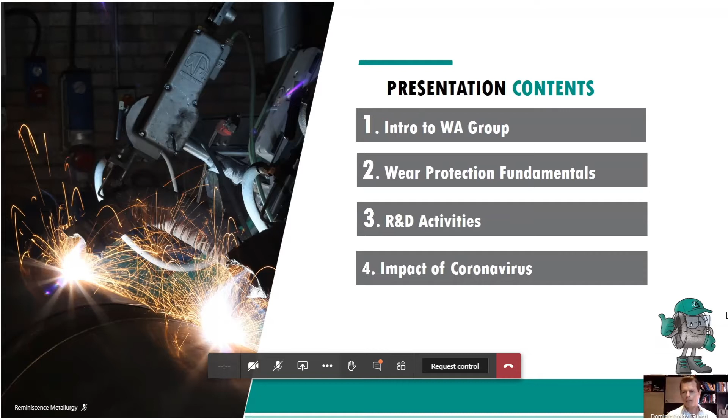Just to give you a little bit of background, the company was started by my dad, Dr. Jan Stekly, and I grew up very close to the factory. Every day my dad would come back from the factory, he would have lengths of wire, he would have little weld samples, and I thought this is... sorry, I haven't gone on to that yet, sorry.

If you don't mind just scrolling back. How about I just tell you when to move forward?

Thank you. So he would come back every day with little weld samples and lengths of wire, which I found unbelievably boring when I was a kid. So when the time came for me to decide what I wanted to do, I decided I didn't want to have anything to do with the family business, and so I became a lawyer. Then after doing that for a few years, I decided to change tack entirely and join my brother in the family business in Welding Alloys. I can say actually that doing metallurgy would have certainly been a lot easier in terms of the learning curve at the beginning, because it's a very, very technical activity, what we do, and it's really rooted in metallurgy, and we'll get onto that shortly.

So there's three divisions basically to Welding Alloys. The first is the manufacture of welding consumables, so consumables being wire, predominantly cored wire, and also electrodes. We also manufacture equipment for wear protection, and we have a service activity where we get components into our workshop and also go on site and do welding service work. If we could move on.

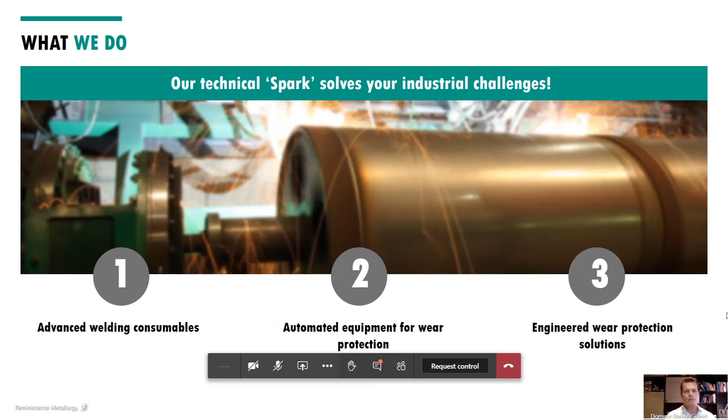So we service a wide range of industries, and the advantage of being well diversified is if any particular industry is suffering a downturn, there are others which make up the slack. So certain industries at the moment, for example, oil and gas is really suffering, and so they might not be spending a lot on infrastructure, but maybe mining is, so there's always some which are going well, some which are not doing so well. I think that's a big advantage to working in an industry which serves many other industries. Next slide, please.

So that's a photo of my dad. He originally grew up in Czechoslovakia, he was born in Czechoslovakia. They left Czechoslovakia in 1938. He grew up in Brazil, traveled to Canada, met my mother in Canada, moved to England, did an MSc in metallurgy at Cranfield University, and after that set up Welding Alloys Limited in Fowlmere, which is a small village outside of Cambridge. Later on in life, he also did his PhD in metallurgy at Cambridge University. So metallurgy, in terms of the formulations of the products that we make, is really grounded within the company.

Today we have approximately 45 metallurgists working within Welding Alloys in different fields throughout the world. We started off making flux initially, and then moved into making cored wire. I'm not sure if you're all familiar with cored wire, but it's basically a process where you take a steel strip, you form it into a U or a V, put in powdered minerals or metals, close it over, and then draw it down, and then put it onto bobbins and spools and drums.

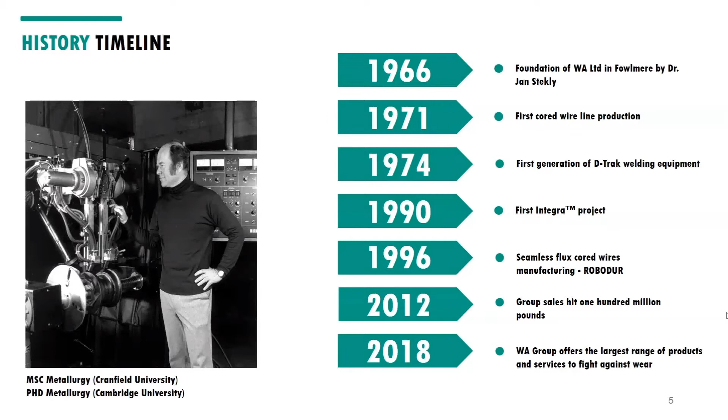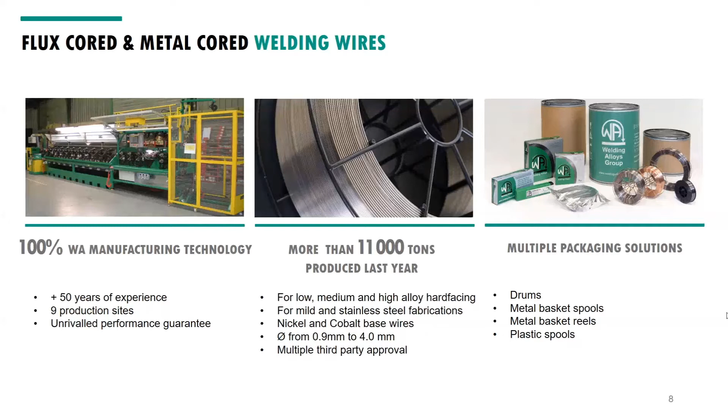We made around 11,000 tons last year, considering a lot of them were very small batches - we'll make 150 kilograms or 500 kilograms of a particular batch to meet exactly what the customer needs from a product standpoint. That's something we do that a lot of our competitors don't. They want to manufacture hundreds of tons of the same product, otherwise it's not profitable for them. We have a very different model where we try to really understand exactly what the customer wants and make the product tailor-made to them. Then the packaging - you may have seen in your time spent in workshops - that's spools, coils, and drums of welding material.

So we have a complete range of hard-facing cored wires. We were more well known to begin with for hard-facing, which protects against abrasion and impact, versus cladding, which protects against corrosion. But we are the number one leader around the world in hard-facing, and we manufacture a complete range of hard-facing materials.

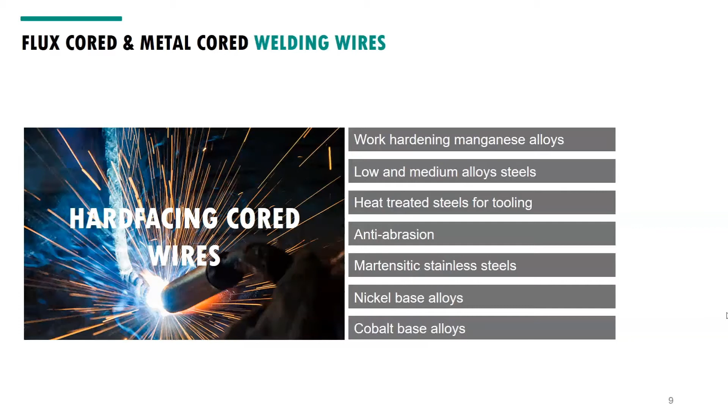Next slide. We also focus on joining to a lesser degree, more focused on advanced welding consumables where there are particular applications where we know we can add certain value to a product or application to make exactly what the customer needs. The vast majority of the welding market is in constructional low alloy steels, used for construction, ships, or bridges. There isn't a lot of value add there, it's a very commoditized market, and we tend to stay away from those sorts of applications.

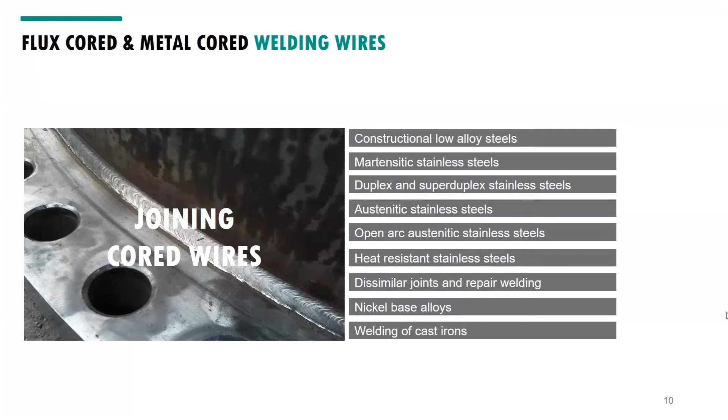Next slide, please. Moving on to our welding equipment - again, this is made in France. On the left here, you can see a 5-head machine, which is used for welding plates, a steel substrate with a welded surface on top, which provides very high wear resistance in an abrasion type of application.

We have a variety of different machines. These are all custom made for different applications. So if it's screw flights or roll cladders for the steel industry, we'll custom make a machine to meet that need, and that is a bit like the razor blade and razor type of application. You sell them a machine, and then you often develop a very deep relationship with the customer, and you end up supplying the welding consumables thereafter. So that's kind of a nice thing about offering both machines and consumables.

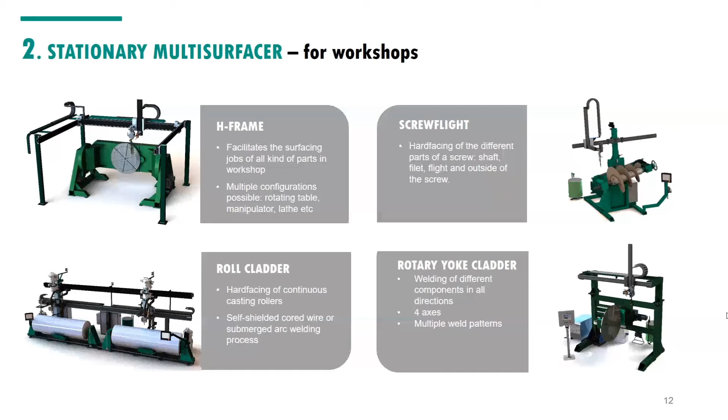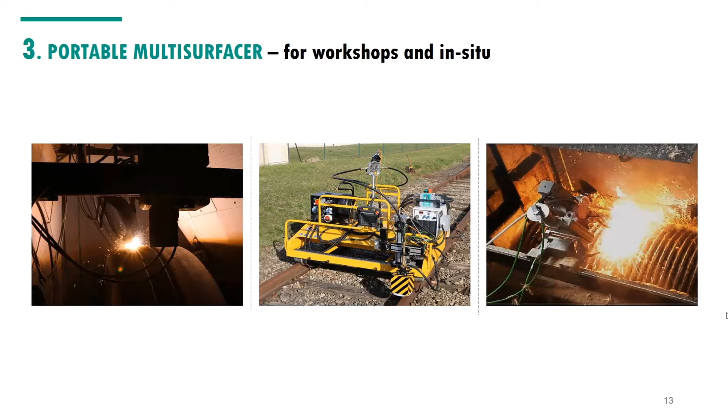And on the right, we have a machine for the sugar mill in the sugar industry. Underneath there, you can see the teeth of a sugar mill roll, used for crushing sugarcane. That suffers from a lot of abrasion as well as corrosion. So we have particular solutions which can be used to increase the efficiency of sugarcane recovery.

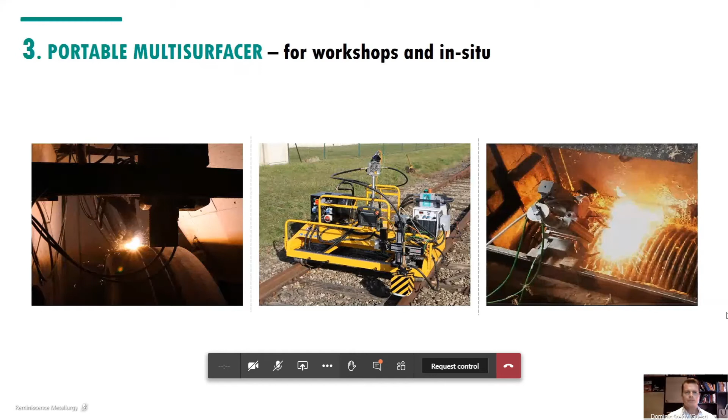Then our Integra services. This is where, like I mentioned before, we use our machines and our wires to provide a complete service to the customer. It's a big part of actually going in, understanding exactly what the customer wants, looking at the wear profile, using our experience as well.

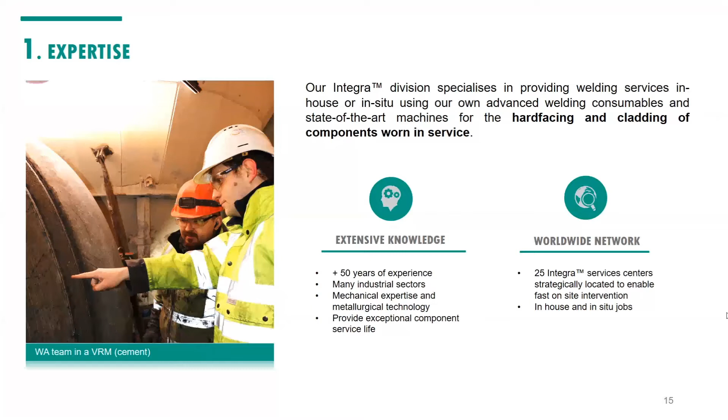Sometimes we will redesign the geometry of certain components in order to provide longer life. And we have about 25 service centers around the world, significantly more than we have for wire production, because it's something where you really need to be local and close to your customer and understand exactly what they need. We go in and offer, using our metallurgical and mechanical expertise, something different and better than what they're used to.

A lot of the time, it's understanding the precise working conditions of that component and understanding where the wear profile is. So even though you might have two identical pieces of equipment in two different plants, the wear profile may be different. And so we'll often use two or three different types of material to weld one component.

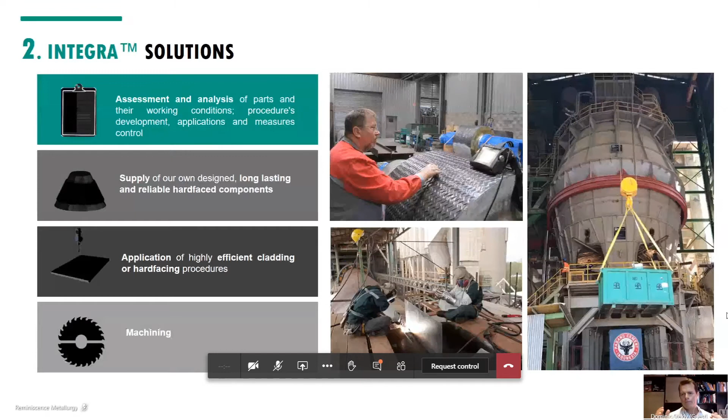In the areas where we have the most amount of wear, we'll use a more high alloy, maybe more expensive type of material, but then we might get a uniform wear profile rather than a severe wear profile in one area, which causes that component to then have to be taken out of service. So we're always trying to make everything fail or wear out more or less at the same time.

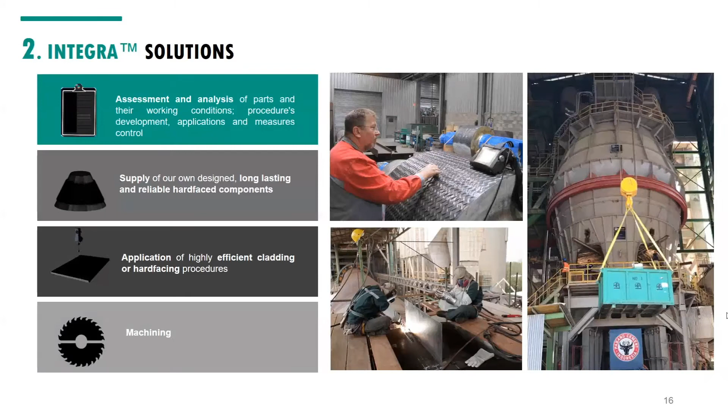And often understanding with the customer when their maintenance shutdowns are, because sometimes a component might be lasting 1.5 years and they don't need 3 years, they only need it to last 2 years. So understanding and offering something which is efficient and just provides exactly what the customer requires.

There are a vast number of different Integra applications. We have, in every single industry, areas wherever you've got any type of material transportation, crushing, milling, grinding, any type of material flowing through another component, any type of hammers or material metal-to-metal wear, we find wear.

So one of the applications, we've got some pipes, we've got a zinc galvanizing pot used in the steel plant, a sieve there which is used for sizing, probably in the sinter plant, hammers maybe in the cement industry, other applications in blast furnaces. But every single industry where there is any of those types of processes, there are applications for us to come in, use our expertise, and make those components last longer.

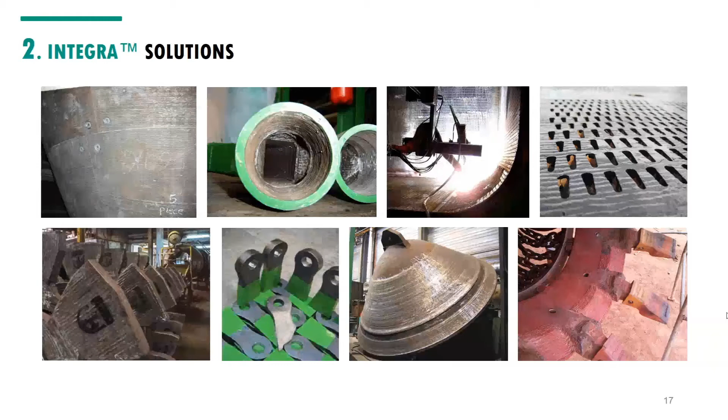So really working together with our clients, we'll look at all of these types of wear. We want to understand exactly what type of wear the component is under, what the part's being used for, what the problems are, what the part actually is, dimensions, photographs, why the last one got worn out, where it got worn out. Sometimes there are things that the customer doesn't actually realize, like maybe the magnetic separator isn't working, and you might get tramp iron coming through different components. We're really trying to understand and go in as a trusted advisor, going through all the details, not just trying to sell them any product, but really understand deeply the application.

I'm sure you're all familiar with carbon equivalent, understanding what the base metal is, and that'll help determine preheat and post-weld heat treatment required, if any, what type of procedure to use, thickness of deposit, whether you can withstand cracks. All of these things can be very important in our product selection.

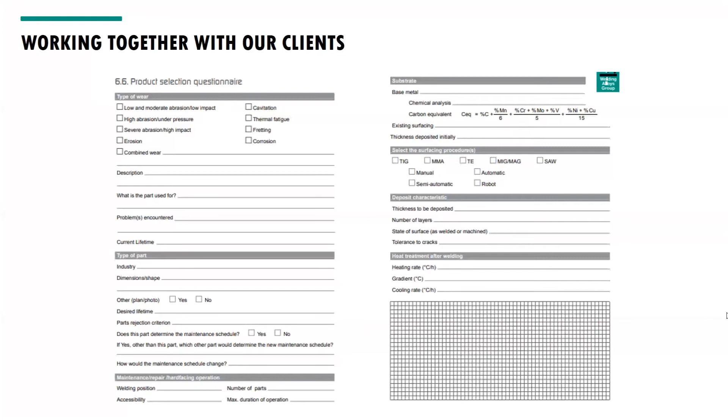So we kind of think of having two different families within the products that we manufacture, particularly our consumables. We have on the left impact and abrasion. We have certain products very good for impact resistance, like chrome manganese type steels, which are work hardening. Other materials are very good for combined abrasion and corrosion, and others are fantastic for abrasion but can't take any impact. Then other materials are more cost effective, like tool steels or high speed steels, where you don't need the longest life, just a little better than the base material.

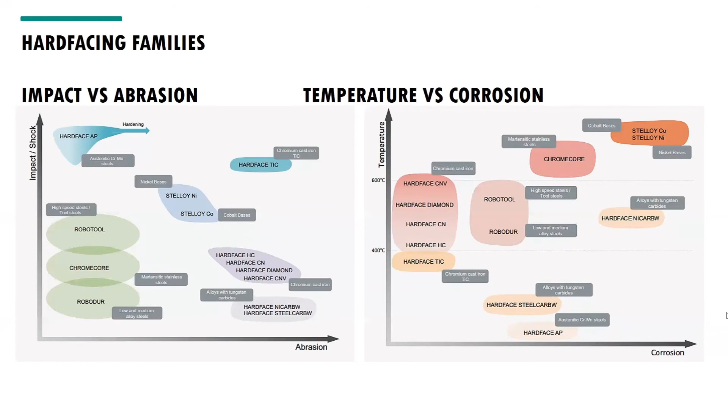And then when you think about temperature against corrosion, we also have materials fantastic at high temperature but not so good with corrosion, other ones fantastic with corrosion and high temperature, and those tend to be cobalt and nickel type materials, which are more expensive at the higher end. But we have a complete range really for any type of wear that our customers are experiencing.

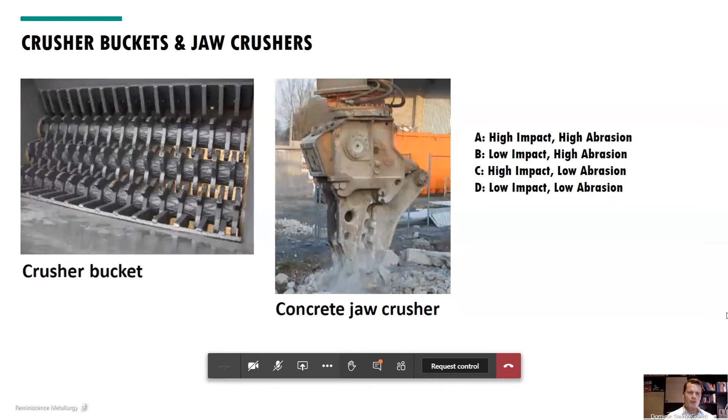So we're just going to do a little quiz, just for fun, to get everyone a bit engaged. We've got a couple of different applications here with multiple choice. I'm sure you're all familiar with multiple choice questions from university, but there's no polling here, so nobody's going to know if you get the right answer or not.

We have a crusher bucket on the left. Imagine pieces of limestone, rock falling into there, all of those components turning around. You can see the hard facing on the surface of them. They're turning around fairly slowly. And then a concrete jaw crusher, which is for sizing rocks, particularly in the mining industry. So would you think that is A, high impact, high abrasion, B, low impact, high abrasion, C, high impact, low abrasion, or D, low impact, low abrasion?

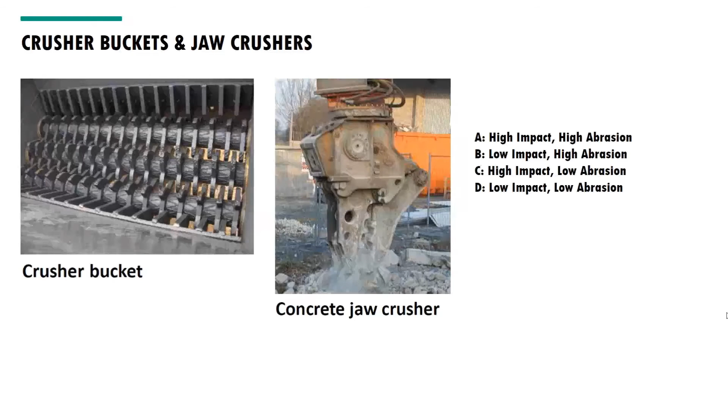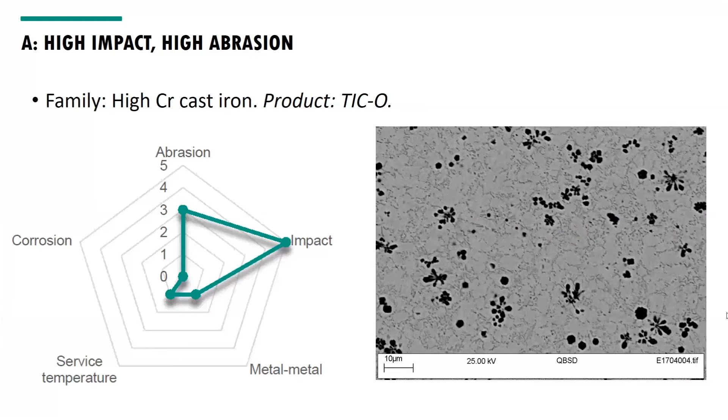And the answer is... well done to everyone who guessed A. It's a high impact, high abrasion type material. You can see we've got an austenitic matrix with titanium carbides dotted in there. The austenitic matrix provides the toughness required for good impact resistance, and the titanium carbides are very hard, which provide the abrasion resistance. So we have a good product there, which is good for combined abrasion and impact.

Next slide please. Another application we have is in drill heads, particularly in oil and gas. Would you think that a drill head would be A, high impact, high abrasion, B, low impact, high abrasion, C, high impact, low abrasion, or D, low impact, low abrasion?

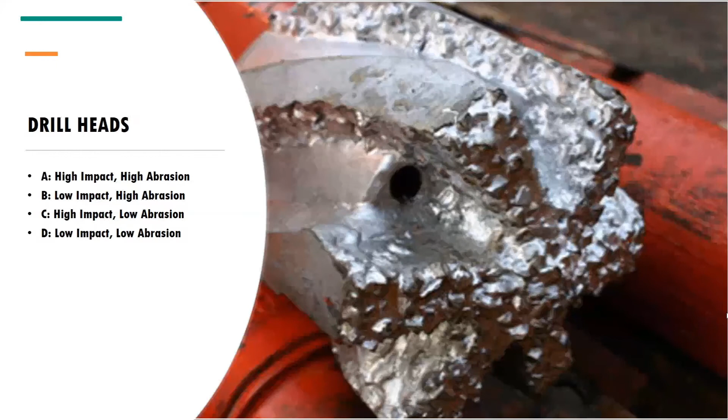And it is low impact, high abrasion. So here we have a product called nicarb, and you can see the microstructure is very different. It's a nickel matrix because we use a nickel sheath or strip. The reason why we do that is because of the toughness that we get from the nickel, but also we can weld at a much lower temperature, which means that the tungsten carbide particles do not dissolve in solution and they maintain their size, which then gives it the abrasion resistance.

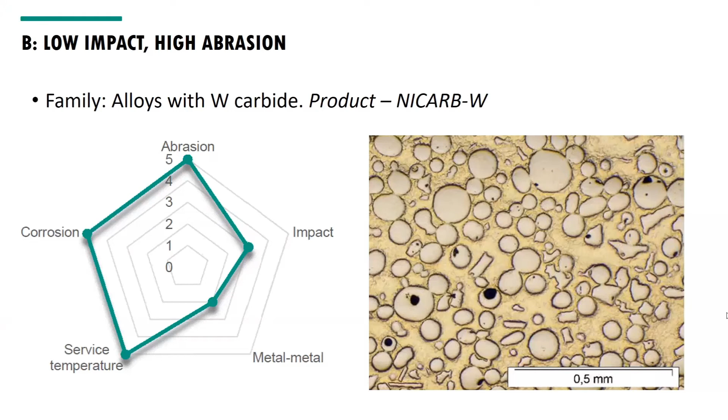If you do not use a nickel strip, a lot of those tungsten carbides, which are quite expensive, will dissolve into the solution, and you'll end up with a tool steel type of material instead. So that's what we use for really, really high abrasion type applications where nothing else works.

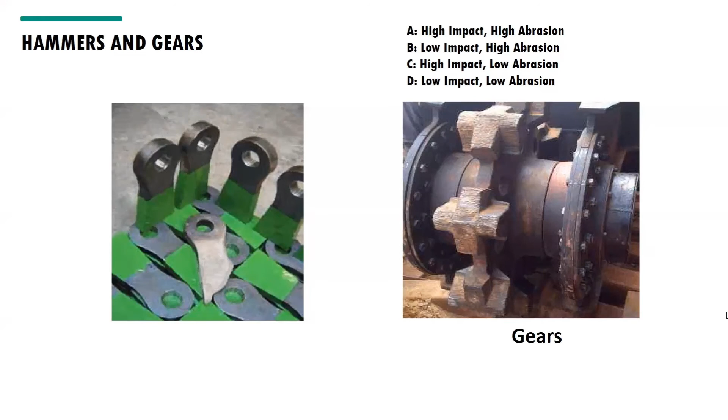What type of material would you think we'd want to use there, or rather, what type of wear mechanism are we looking at here? Do you think this is high impact high abrasion, low impact high abrasion, high impact low abrasion, or low impact low abrasion? Make your guesses.

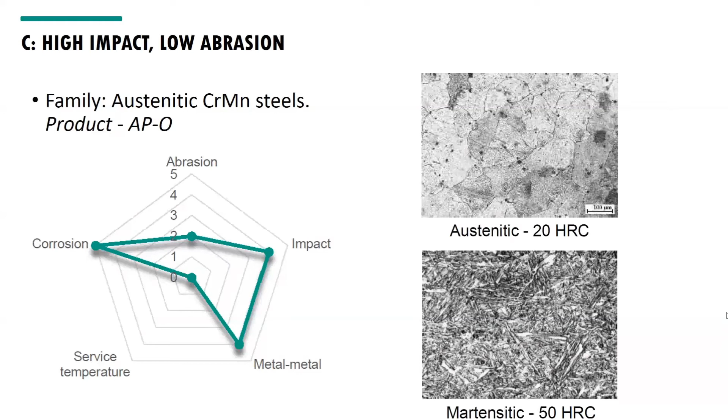The answer is high impact, low abrasion. For that type of application, we'll use an austenitic chrome manganese steel, called AP-O. You can see in the as-welded condition the microstructure on top is only about 20 Rockwell C. After work hardening, it increases significantly up to 50 Rockwell C, and that is a fantastic type of material for a high impact application, which we'll use on hammers very successfully, and gears. Thank you.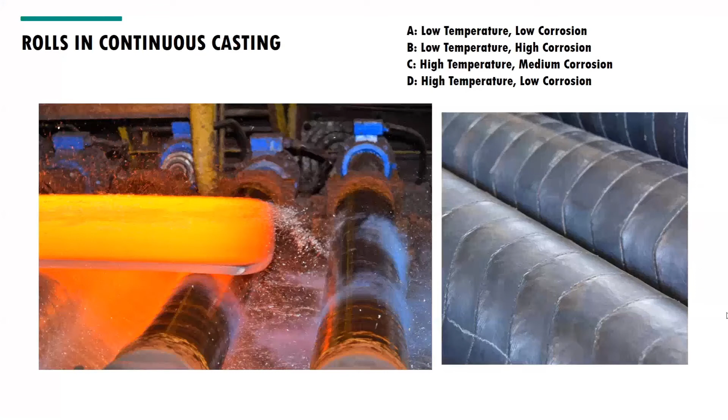Low temperature low corrosion, low temperature high corrosion, high temperature medium corrosion, or high temperature low corrosion? And it was C, high temperature, medium corrosion.

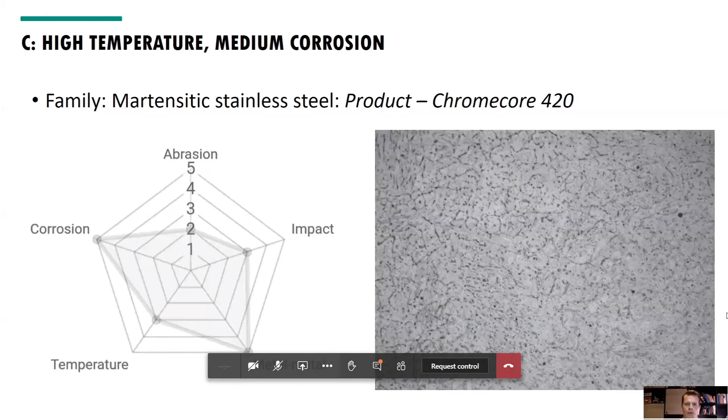For this type of application, we'll use our 420 stainless steel, which is a martensitic structure, a very, very good all-round material for corrosion and also erosion at high temperatures. So if you got all four correct, you can give yourself - I'll give you a virtual thumbs up.

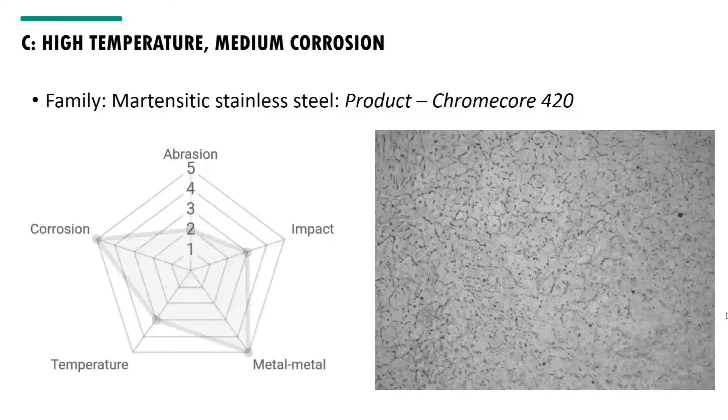So some key R&D initiatives that we are having in the company. Some key focuses for us at the moment. If you could scroll on.

Laser hard surfacing, so laser hard facing or laser cladding - we see a huge amount of opportunity with this. We have a number of trials going on right now. Welding of continuous casting rolls is a very big application for welding alloys. Normally it's welded submerged arc or open arc, and we're finding very, very interesting microstructures using lasers. So we're working with an academic partner in the UK, an industrial partner, and it's being spread out throughout the company to start offering this service to our customers.

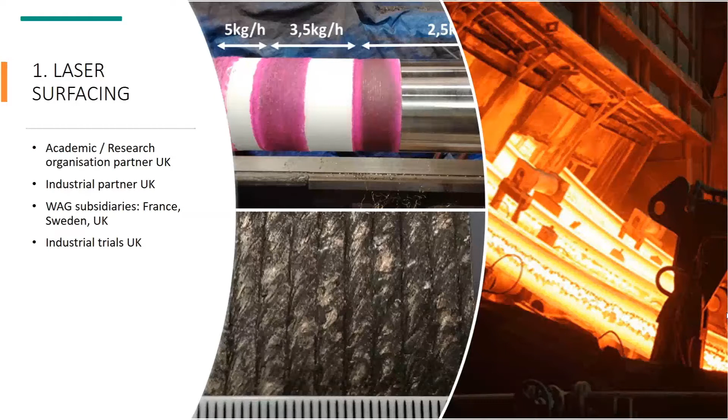Sorry about that. That's my children.

Starting to - we're starting to gain significant market share. It's a big opportunity as well with this type of application. Next slide, please.

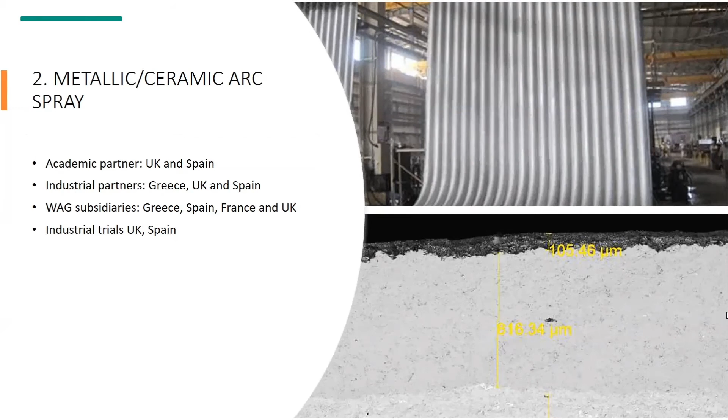So we've been working with machine learning. We have a huge amount of data sets, and it was interesting to hear you, Dr. Ghosh, talking about the data, because we have a lot of data within welding alloys that we sometimes did not know always what to do with. When we're making a welding wire, when we're formulating a welding wire, we'll think about what types of alloys to put in, and then we do a lot of...

G65 wear test. G65 is the main, the only ASTM approved wear resistance test. It's a sand and rubber wheel abrasion test, and we have a lot of G65 results. We have a lot of different chemistries that we've made over the years that we'll experiment with. Obviously it's quite a long and painstaking process to make a new wire, develop it, formulate it, make it, draw it down, put it onto a spool, weld it, analyze it. You don't really want to do it unless you've got some confidence that you know it's going to be something good and something interesting.

So by putting in all of those data sets that we had around the materials that we've made in the past and the G65 results that we got, we've had some very interesting suggestions or outputs from it.

So some of them have been giving us some chemistries which are actually allowing us to significantly reduce the cost of the wires that we make to achieve the same type of wear resistance. And in other cases, it's a completely new type of alloy which we'd never thought about before, but provides extremely long wear resistance. So it's helped on the lifetime side and also on the product cost side.

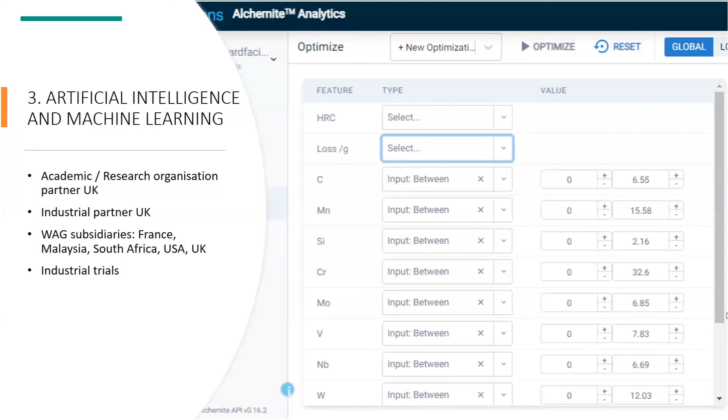So this is another R&D project where we're basically using a twin wire process. The first wire is welding, and that's a normal hard-facing wire, and the second wire has tungsten carbide particles inside, much larger ones than the nicarb product I was mentioning earlier, but much bigger, very highly visible to the naked eye. So big components, and we're able to put those using a continuous process into the weld pool.

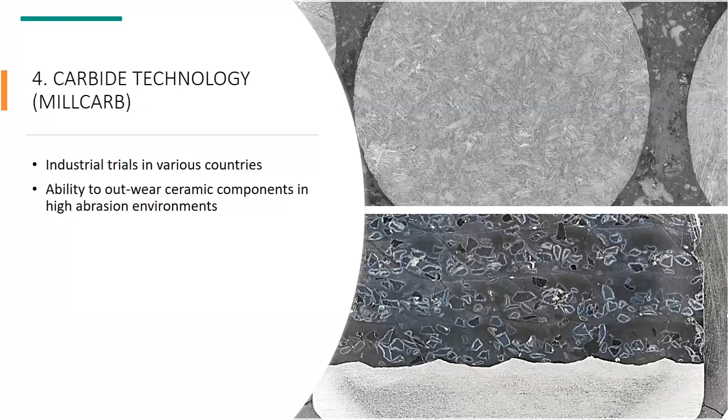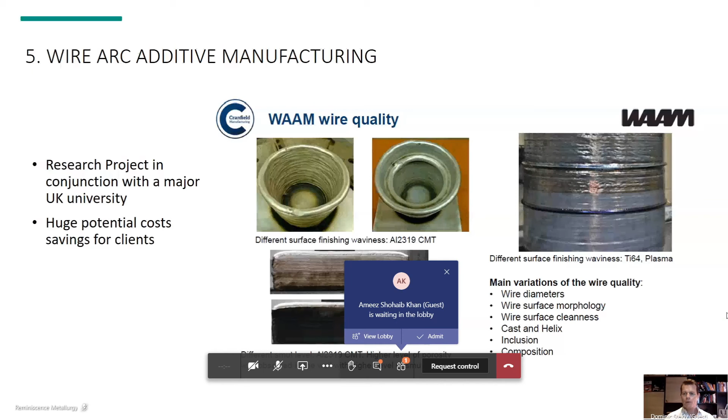We're also working with Cranfield University on wire arc additive manufacturing. There are some huge opportunities for cost savings for our clients. You can imagine the amount of waste if you need to make a small component and machine out the center of a pipe, and it's made out of a nickel alloy, for example. There's a huge amount of material wastage costs. So we're working on using our materials, which are designed specifically for this type of application, to then work with our clients in order to manufacture parts, a little bit like a sort of 3D printing type of application. And currently, that's just a research project at the moment.

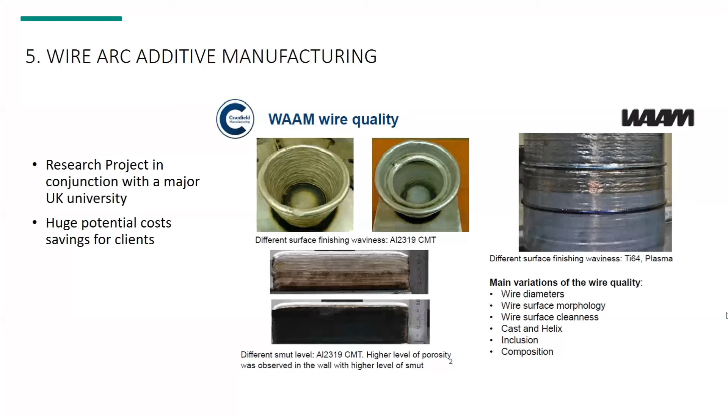So those are some of the main R&D initiatives. There are also a ton of other wires that we're continuously developing. We have R&D teams around the world, and they are also developing the whole time new wires and new formulations as well. But those are some key R&D initiatives that we're all quite excited about.

So obviously, COVID-19, it's been quite a rough year, I think, for everybody. And I guess, I don't know when you're all graduating, but maybe it's good timing for you or not, I'm not sure, but it'll finish at some point soon, and I'm sure we're all hoping it's much sooner than later.

But going on to the impacts for welding alloys, there's two main impacts, I'd say. One is that we're not able to go out and visit our customers. Or rather, we are in certain cases domestically in our own countries, but we do a lot of international sales, and we're unable to go and get on a plane and go to Madagascar or wherever it is that our customers are asking us to come and visit them.

So we are mitigating that to a certain degree, having as many webinars as we can with our customers, but it doesn't really replace carrying out inspections. Going into the customer's site, having a look around their boneyard, which is where they keep all their old components, and looking at which components we think we can repair, which ones we think can be sent to our workshops. So there's a lot of things which we can't do over webinar, but we have managed to get some significant orders over webinars as well. So I think customers are starting to come around to it as well.

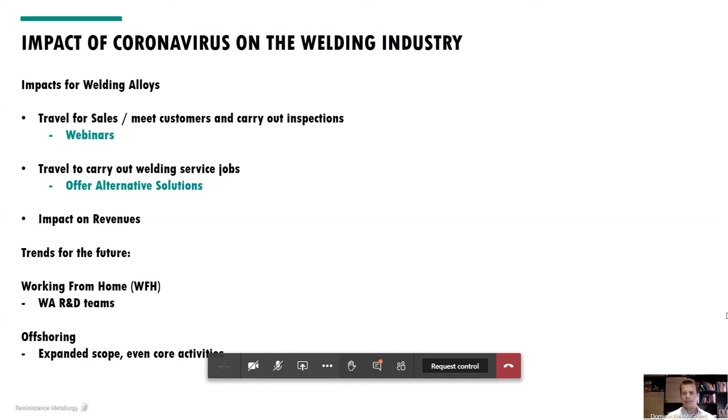Also for us, we've been unable to travel, particularly internationally, to carry out welding service jobs. So we've had to offer alternative solutions. In some cases, that's the customer sending us their components internationally. They're usually not very keen to do that because there's a lot of cost and customs and admin and paperwork to figure out. But they have been quite receptive as well.

It has happened in some cases, but they've also been quite receptive to us offering new components which have been pre-hard-faced. The impact on our revenues so far this year is about negative 20 to 22 percent. And from my discussions with other people in the welding industry, that's pretty much standard.

It's hard to know exactly how much of that is jobs which are going to be postponed, which we'll end up doing in the second half of the year, and how much is an actual drop in demand. Certainly there's an element of a drop in demand. The German automotive industry was shut down for two months, so there has been a drop in demand for sure. But minus 20%, considering this is probably the worst crisis in 100 years, or maybe since the Second World War, I think is not too bad, and it goes to show it's quite a resilient type of industry.

So we don't go through extreme peaks and troughs. Generally speaking, when the economy is going up really, really fast, we'll sort of go up a little bit, and when it goes down a lot, we'll go down a little bit. So it's a fairly steady type of industry to be in. And like I mentioned before, having that diversification across many different industries and across many countries also helps.

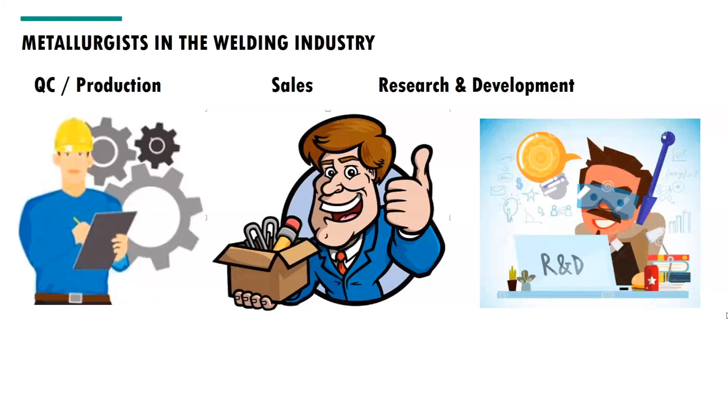So you have to be quite resilient and also very outgoing and personable to be successful. Then we have research and development, which looks at trends for the future, formulations, tweaking our formulations, understanding different flux combinations with different alloys, and how things work best to make our products run smoother and provide longer life. I think that suits people who are very cerebral and creative. There are opportunities within our industry for people in all three fields.

So I guess it's up to you all to think about what type of person you are, what type of character you are. You need to think, okay, if I want to get involved in the welding industry, that's the path that would suit my type of personality.

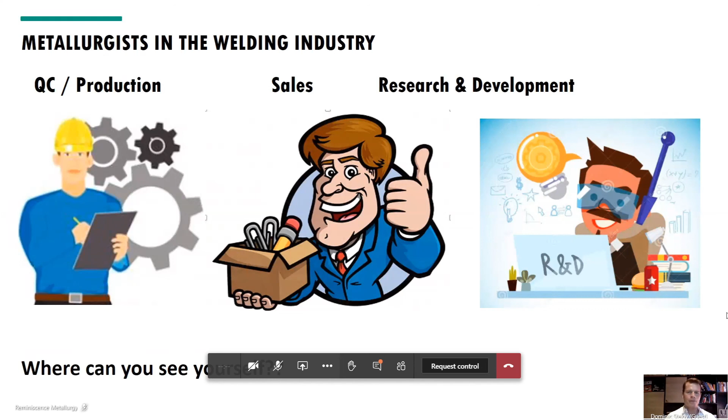Okay, so I think that's come to the end of my presentation, so I'm happy to answer any questions. Thanks again to you all, and congratulations again to you all, to the department, and also to all the students that have been listening. Thank you.